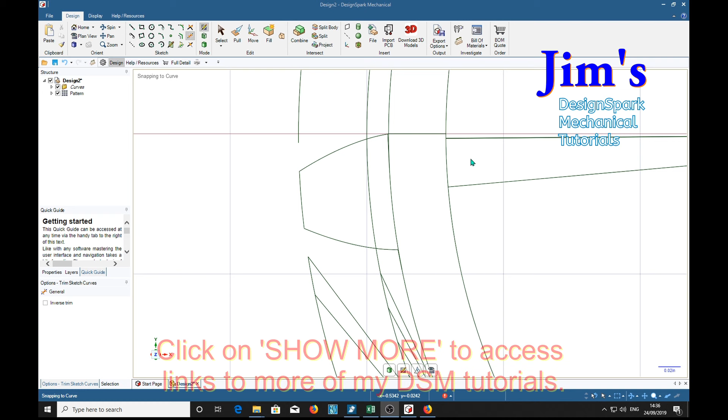We also don't need these lines, we can get rid of that and that. There's a little line in there. We want that one, and we need another from here to the root diameter.

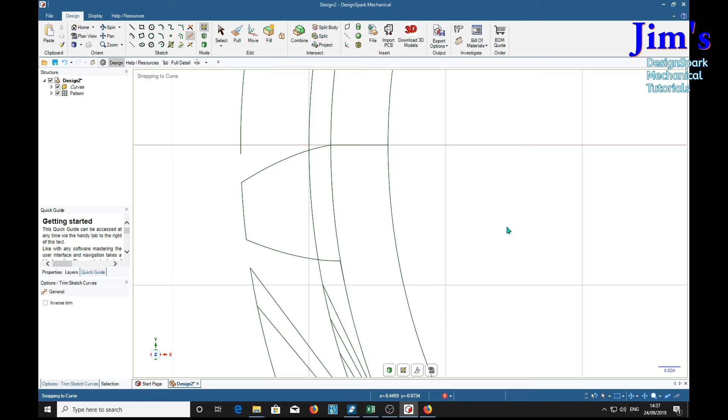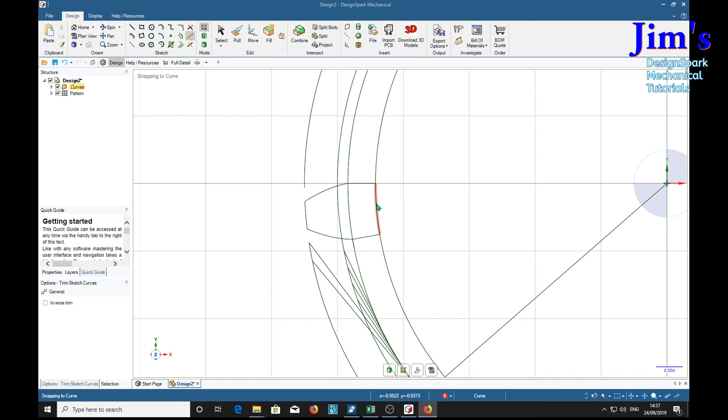Trim, and there's our tooth, which we can...

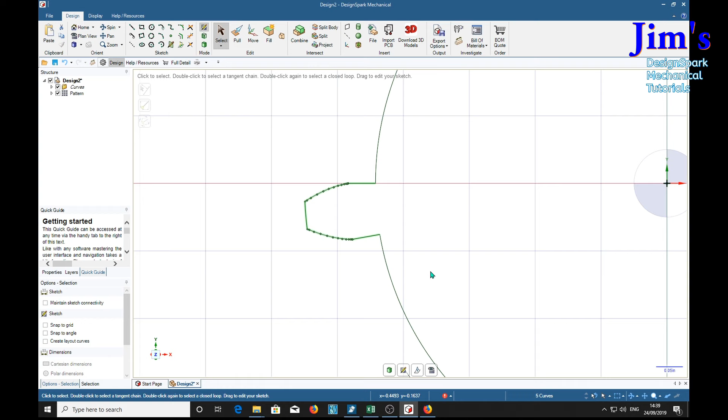So the magical task now is to select the move tool, select, turn off the snap, and select a tooth, move, find our center, and we're going to create a pattern. This time we are going all the way around, so once it starts to multiply, there you go.

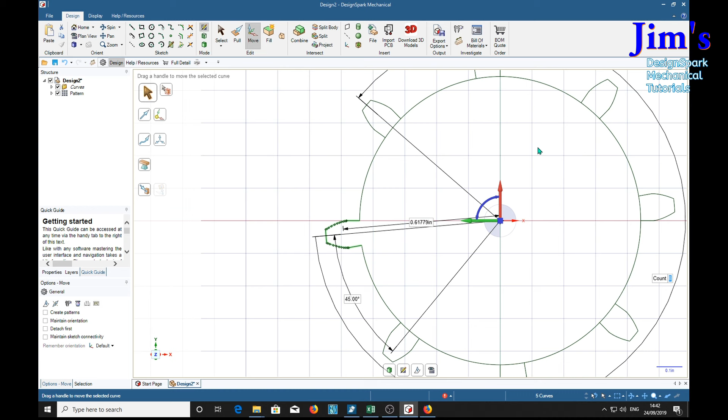Tab, 45 degrees, tab, tab, count, 20. Trim.

And that is the end of part 3.